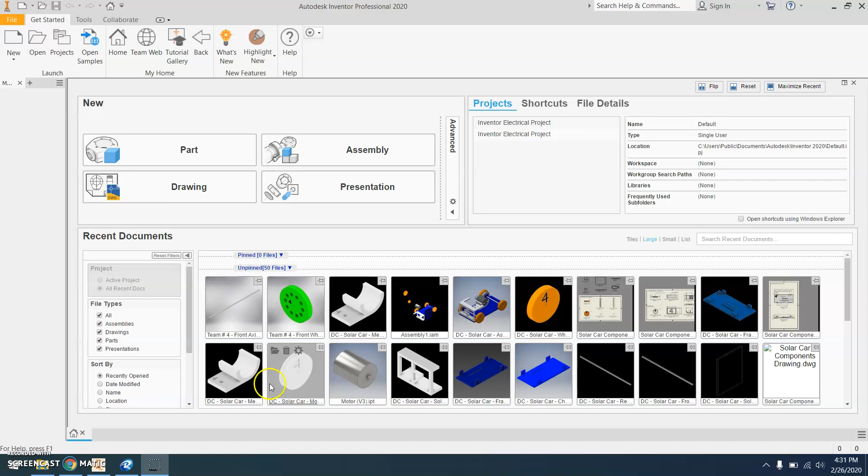In this video, I'm going to show you how to model the axle pulley. This is the one that'll go up against the wheel and will cause the wheel to move. This is not the one on the motor.

So File, New, and then make sure you go Part. Once this opens, start a 2D sketch. I choose the XY plane, doesn't matter. And then what I'm going to do is make a circle.

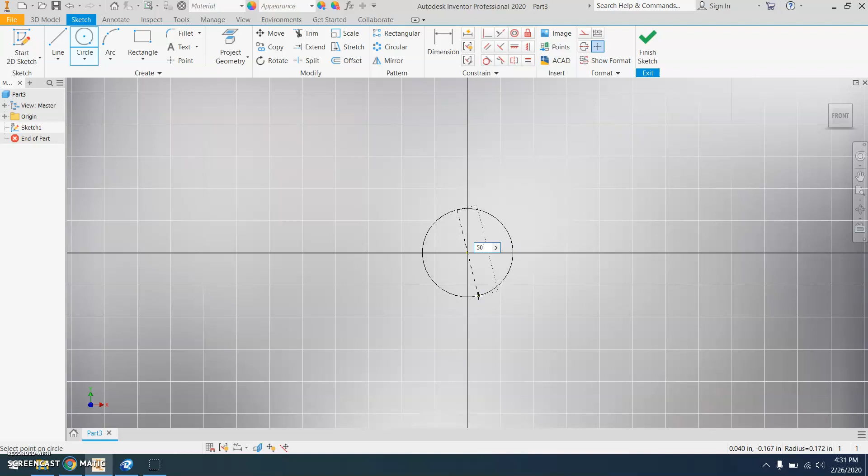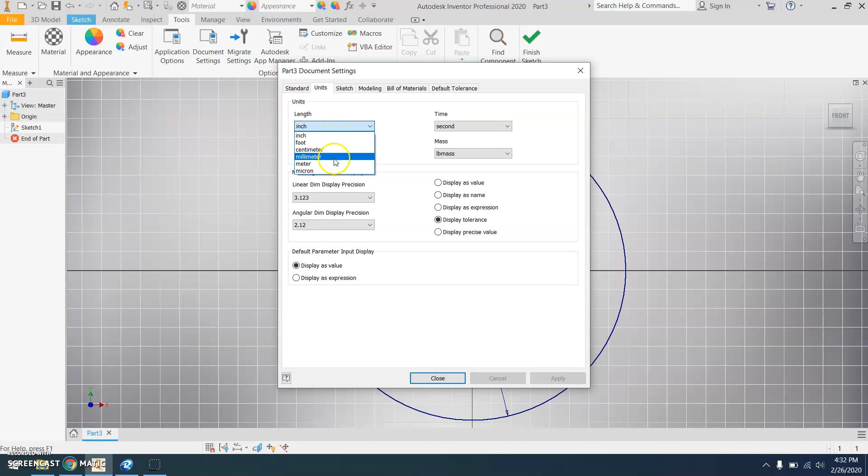I'm going to use numbers that are kind of too big, so make sure you're using yours. Make sure you put millimeters this first time, unless you're using inches. If you're using inches, you didn't need to do that at all, and you don't have to do what I'm doing right now. If you're using millimeters or centimeters, change that here. I'm using millimeters, there's centimeters if that's what you want to do, up to you. Hit OK. Make sure that number is the same as your sketch.

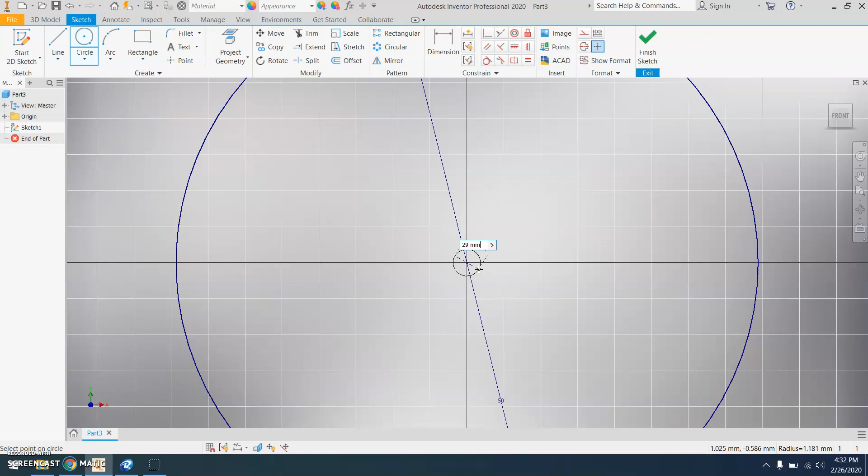Now the hole at the center though, this will be the same for everybody, don't mess with this. 2.29 millimeters. Once again, if you're using inches, what you need to do is do a conversion, or you can put mm in this case, and it'll convert you if you're using inches.

All right, so this is just going to be one side of it. I'm going to finish this sketch, and I'm going to hit extrude. Let's extrude this by 2 millimeters. I think that gives us a pretty good thickness where this isn't going to break off on us. Hit OK.

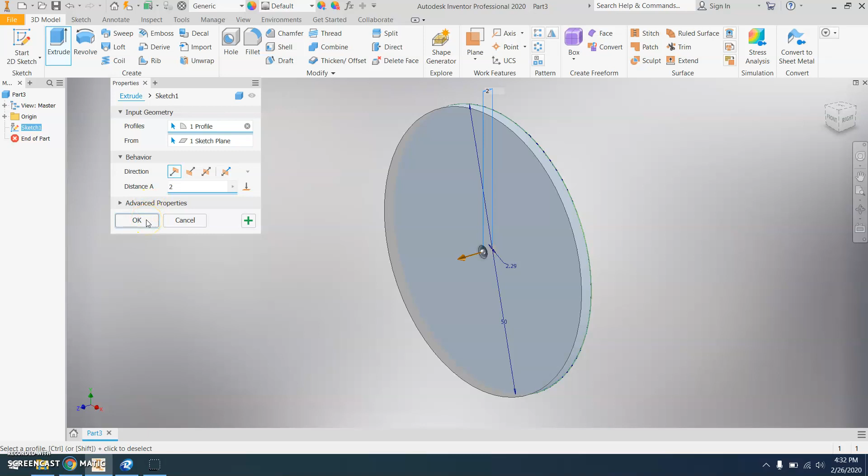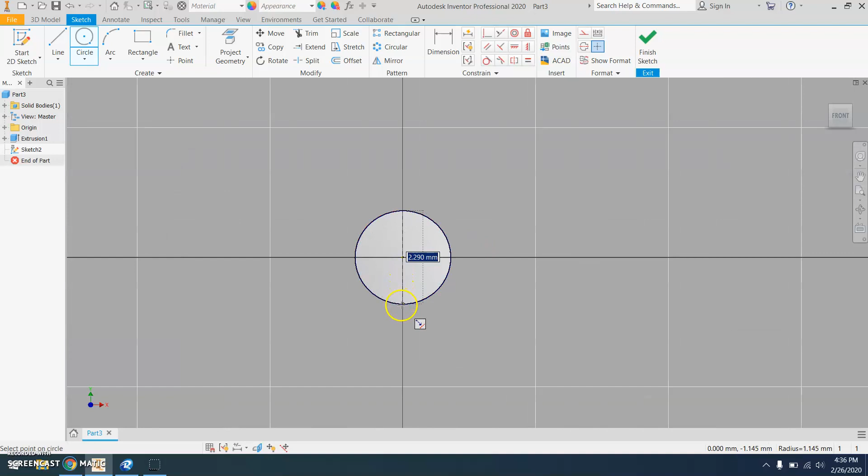Next, I'm going to model the center of this. To make the center part here, where the band will ride upon, let's do a sketch on the surface. Let's make a circle first that is the same size as this, so that 2.29 millimeters. Once again, if you're using inches, you're going to have to do this a little differently. Make a circle that just goes out, we're going to change that in a moment.

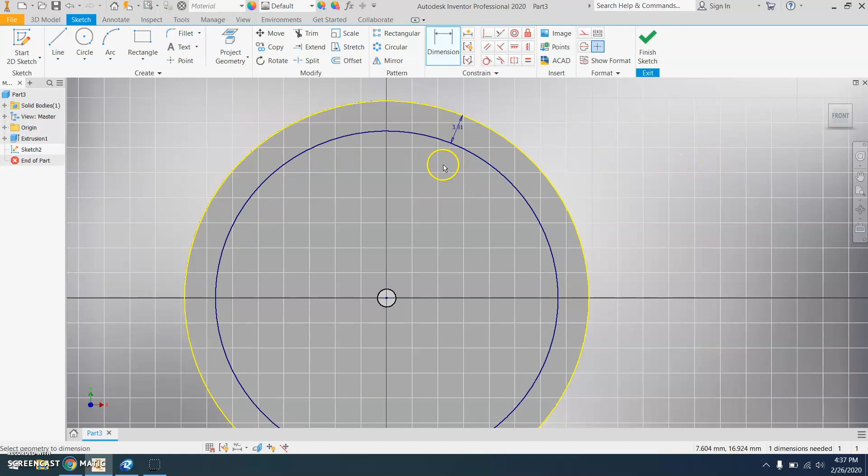You're going to dimension between these two, and hopefully I don't confuse you with mixed units here. When I originally did this project, I did it in inches, so I know exactly what size will work in inches, and it's not as clear with millimeters. We could use a conversion, but 0.15 inches, so as long as you put that in, the computer knows what you're doing. If you're already using inches, then you wouldn't need to do something like that.

All right, let's finish the sketch. Let's 3D model it and do an extrusion. The band, I found that 0.15 inches works best.

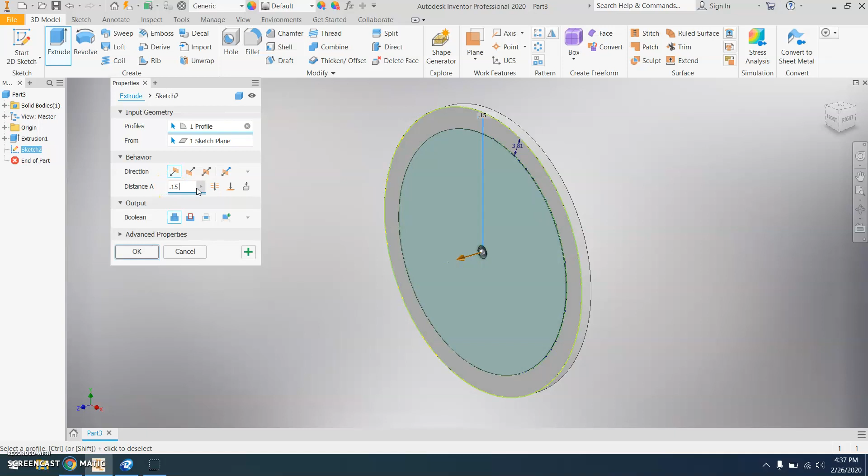Okay, so now we got one side. We've got to do the outside here so that the band doesn't fall off. Right now the band would just fall right off of this. So we're going to do a 2D sketch right on the surface here.

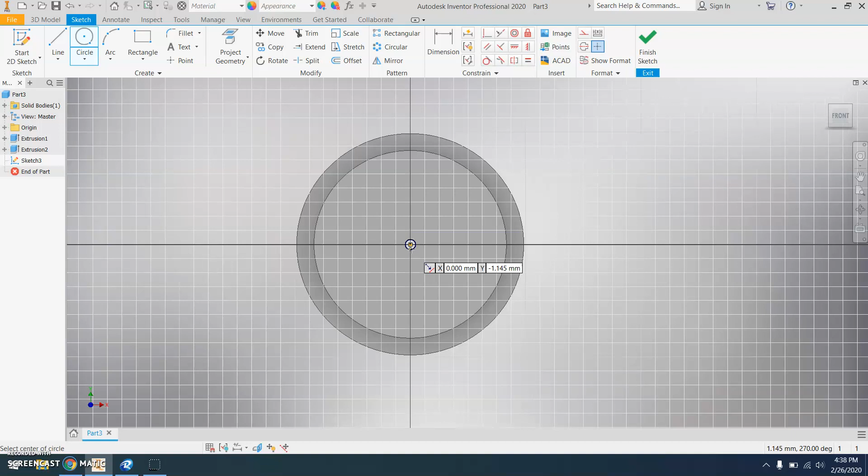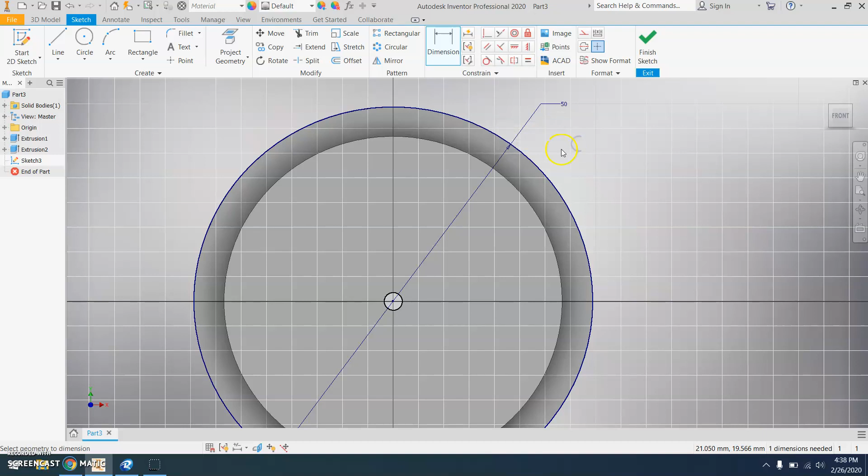Again, with the circle, we need to zoom in and make a 2.29. You then want to do another circle, you may have to hit the tool again, for me I didn't have to, and then snap to the other side. Now notice it did snap to 50 and was good, but proper form would be to actually dimension this the same. So I got that center hole, I've got the outer circle here.

I'm going to finish this up and do an extrude and choose this outer surface here, and then like before, I like the number 2 millimeters.

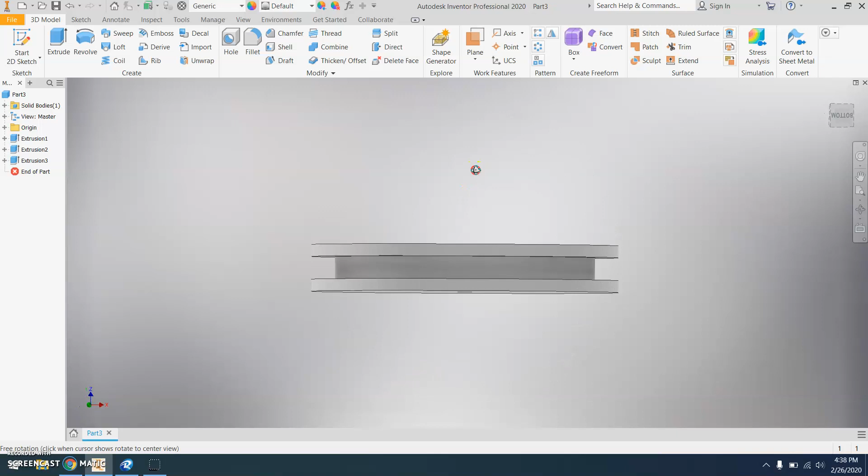All right, last thing we need to do is put our team number on here. So to do that, you're going to do one last sketch on the surface, hit the text tool. Team number, I like the number 4, like I said before.

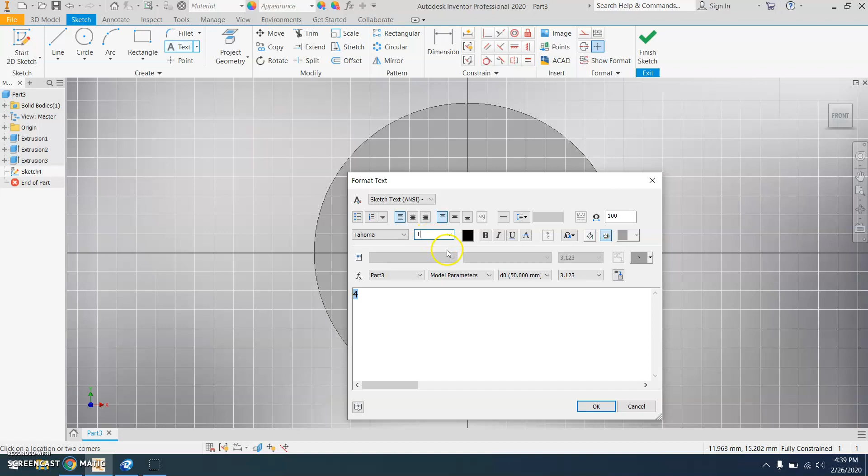Let's just play around with this number. You can bold it, you can use different fonts. If you drop that down, just make sure it's always highlighted, otherwise it won't change. Now this is huge, now you can click and drag on this.

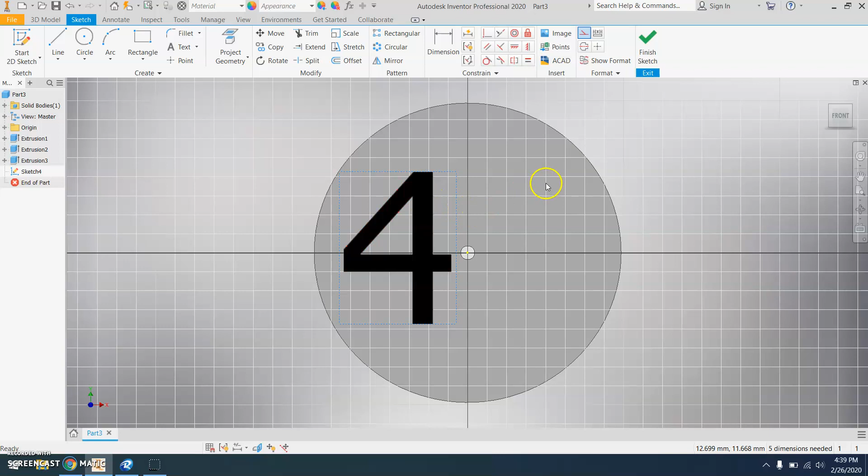All right, pretty large. What I could do here, and I highly recommend this, is you need to cut this. If you don't cut this, it could end up hitting your car as it goes around, or you could have a big gap between the wheel and this because you couldn't glue this up against the wheel.

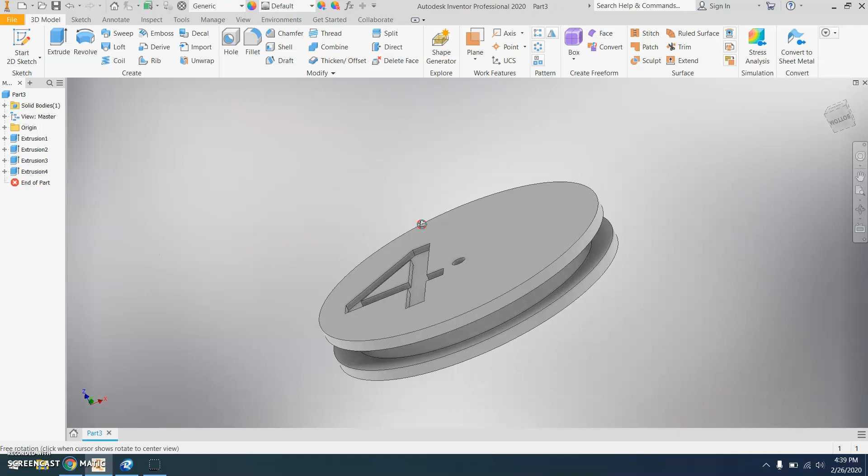So hit Finish Sketch, Extrude, choose the 4, and like I said, I would definitely do a cut. I would not go all the way through this though, I'd make it shallow, like 1 millimeter. Hit OK, and notice now it's indented. You got your team number. This actually makes it lighter weight too, which is nice.

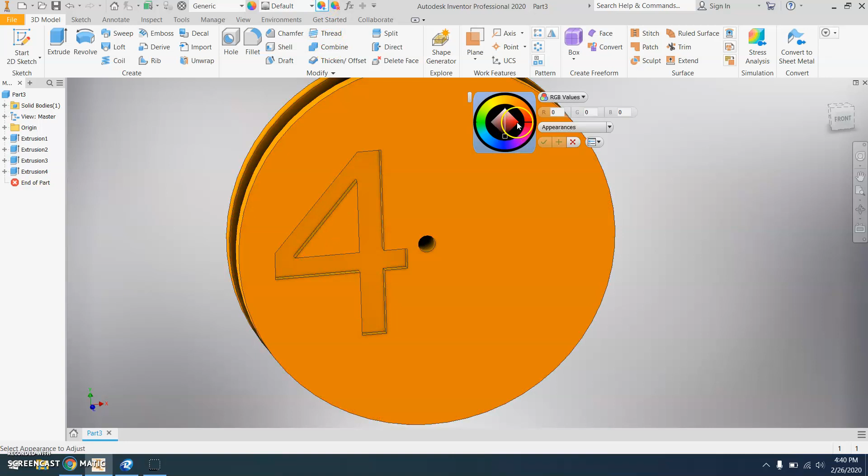I like when people color this in, I think it's more fun. So use the color wheel here, choose a color that you like, hit the check mark. And then I'd appreciate it if you colored in the 4 so it's really obvious to me when I check this. So just choose this surface and then click and drag this down until you've got black.

The last step always is to save it. So File, Save. Make sure you give it the name like I've been talking about, team number. You have a different number, and we're going to call this the axle pulley. This is going up against your wheel. Hit save, make sure it's in your H drive. Let me know if you have any additional questions.